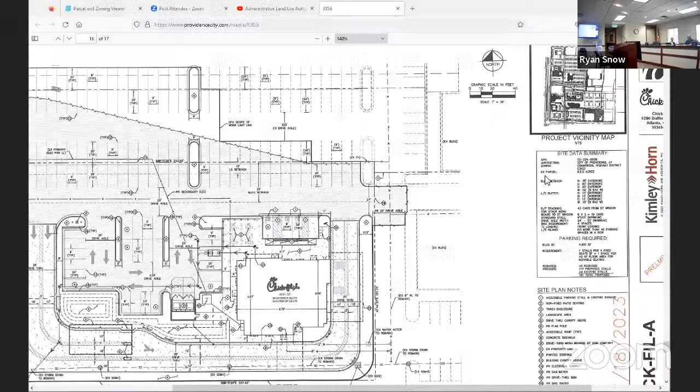Right, but further east of that, if you look on the vicinity map in the upper right-hand corner, that very, very east development there, we made sure there would be access - vehicle and pedestrian - coming through that development, so it can come down into your development. So you can have pedestrian access as easily as others, but I'm not really seeing it.

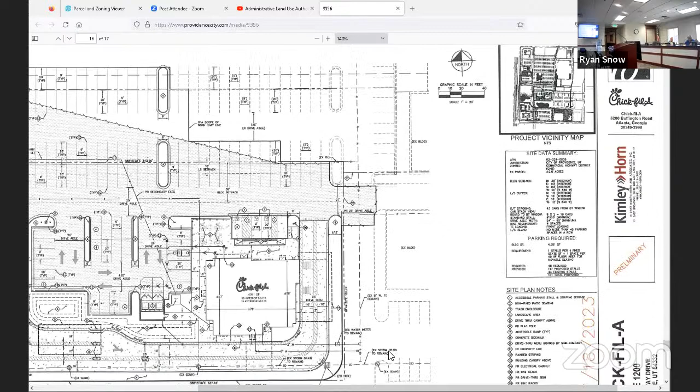It actually looks like it's going to come down more on the north side or south side of the site, Ryan, if it lines up with parking - I think it lines up with this west park, or this north parking or south parking, this existing building down to the south here.

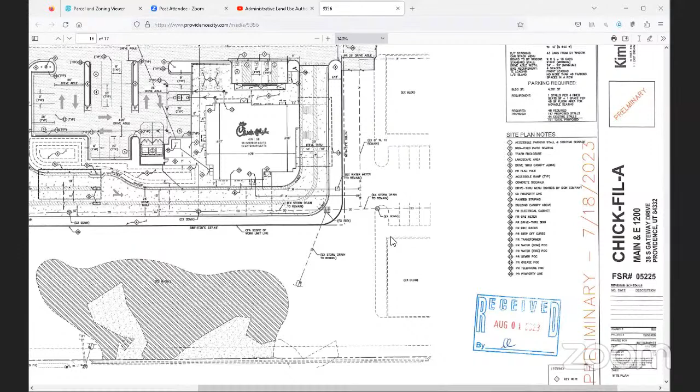Right. I think the comment I can add to this is kind of going back to what the landlord and their civil engineer provided to us - they show it as existing, but really it's proposed. And I went on site about a month ago - yeah, there's nothing there, this is just all dirt.

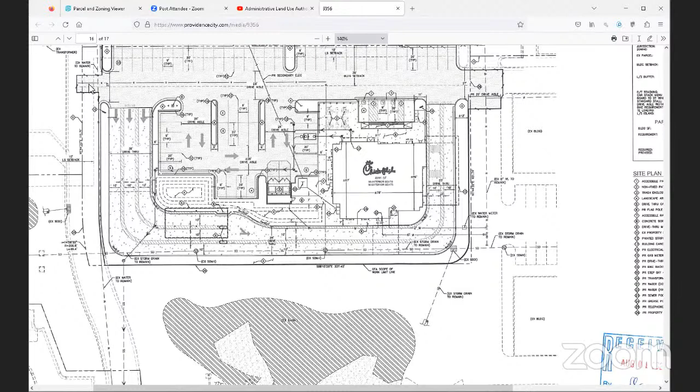So the intent was to make sure we could provide future access to and from, and provide that drive aisle you see on the upper right hand of the screen right now, which would go east-west, and then cars could come north-south. But as far as what's there now and providing full access, everything would come from the west or would come down the north-south drive aisle on the east side.

Because we're not planning to put in that full north-south road on the east side, all the access would be either on the west, which is where the cursor is right now, or would be coming kind of in front of the Dollar Tree - just a little bit to the east - they would be coming down through that drive aisle.

So I think to answer the question of what we're showing or what's proposed for access, we are showing that square area right below the cursor for future access, so cars can comfortably come in and out and there's full access. But we don't have plans for building anything out since we're just leasing this property. I don't know if that helps answer the questions.

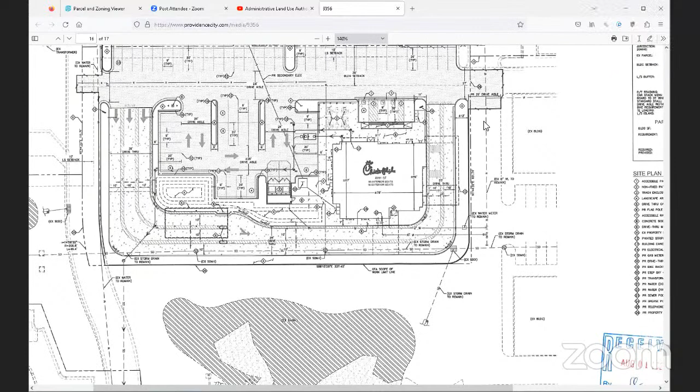But everything that's shaded in your parking lot part, you are adding that, right? So you are adding that one little square to the east of you? Yes, for future access, because again it's hard to see, but just to the left of the cursor there's a property line boundary. And in the negotiations with the landlord, they said they want us to provide this so there's access out to the east, so cars can exit and potentially go left or right.

So we'll provide that access. And then in the future, they would build those existing buildings that you see that aren't currently there, and they would build the rest of the access ways to extend it all the way to the east and all the way to the south, however far it would go.

But yes, we are putting that square in, and we are putting in all of the parking lot to the north that currently is kind of, I don't know if you've been on site or can see the Google images, but it's kind of like a diagonal asphalt area. So we'll be filling it in to look how the site plan is shown. Okay, yes. So it'll be a complete pad and lot.

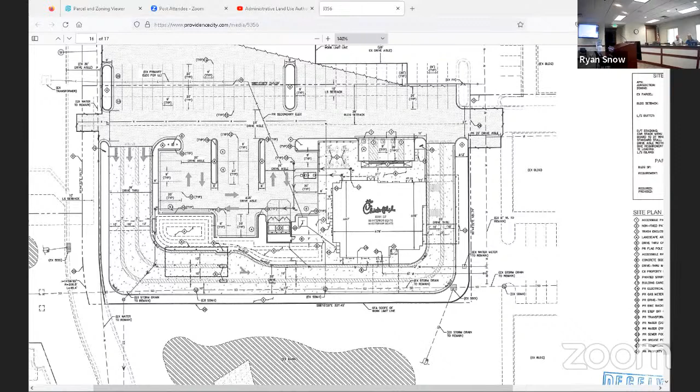So are you planning on doing the offsite extensions to get to those water lines that don't really exist yet? No, that'll be by the landlord. The landlord will be stubbing all of the utilities, including the water and the sewer, to our property lines. They'll get permits for those. And then we will just connect inside of our property lines. That's how the landlord and the applicant Chick-fil-A have negotiated their lease agreements.

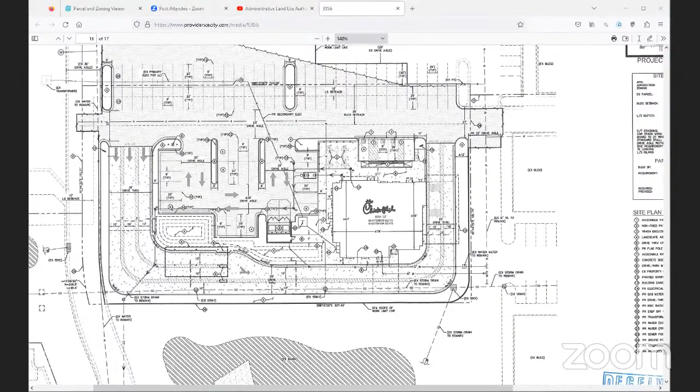So that makes it a little difficult for us. I know we kind of got a chicken and an egg thing going on, but we actually need to see your landlord's plans to make sure that that's all going to happen so that we can. We don't want to permit something and have you get down the road and then not be able to have it happen because your landlord isn't doing what they're supposed to. We just don't want to get in the middle of that.

So I'm in a little bit of a quandary. That's probably why it shows these buildings. In other words, Amsource has got grand plans for existing buildings and how they're going to grab utilities, all of these little grand scheme plans, but we haven't seen that plan.

So I guess I would be willing to say that we could consider this site plan conditionally, and then conditionally enough that you could move forward to get us the plans that we need to be able to give you final approval. Does that make sense to you?

I think so. I think from our perspective, one of the things we just try to confirm is from a site plan layout perspective, does the operation, does the circulation, does the setbacks, does the building location, do all those things look good in the city's eyes? And are we okay both by landlord's perspective to do utilities and then by the applicant's perspective, are we okay to move into permits? I think at that time, the landlord would say okay, and we would say the site plan is locked down. You're not really going to be moving major items in the site plan. Let's get those utility designs, let's get the permits for those, and then we can proceed into building permits after. Does that sound like what the city is looking for or willing to do?